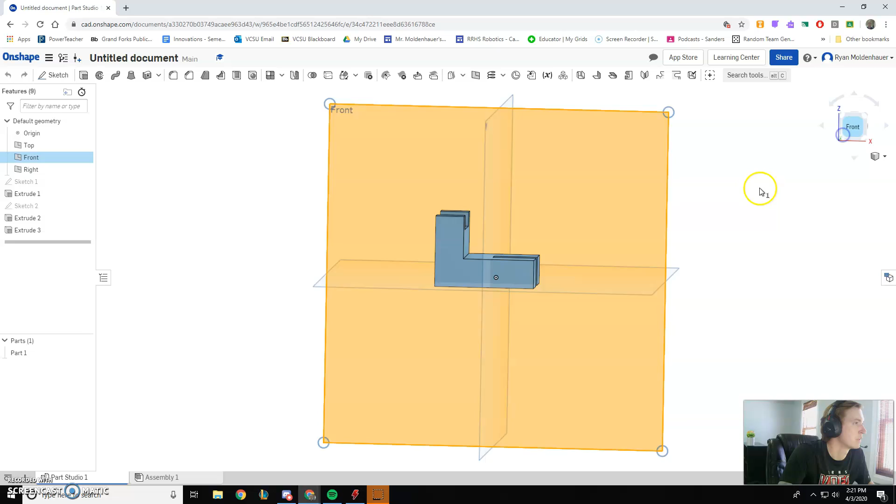One main thing that I noticed that made doing drawings a lot easier is when you draw this, use these planes to set it up the right way. When I did my drawing, I started with the front being my front view that I want. So when I knew I was going to draw this L, I put it on the front. The first time I drew this, I didn't do that, and it made it a lot harder to do my assembly file. But if you go ahead and put your front view on the front plane when you draw it right away, and have it the way you want, it'll make doing your drawing so much easier.

So here's an example. Once I have my part, your assignment this week is to do a fully dimensioned drawing of that. Now you can go over here and hit create drawing if you want, or you can just right click the part and create drawing of part studio 1, which is the name of my part right now. Now I can select no views, which is what it would be like if I wanted to make a new one. Notice how I don't have 4 views there.

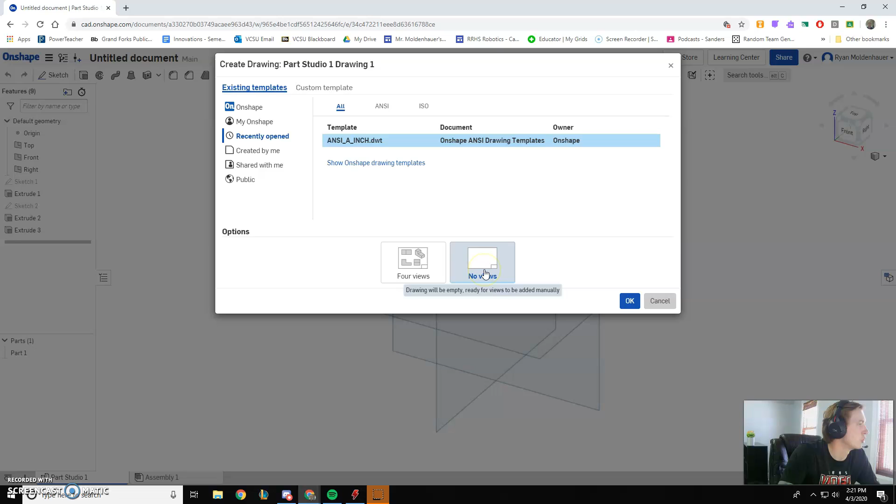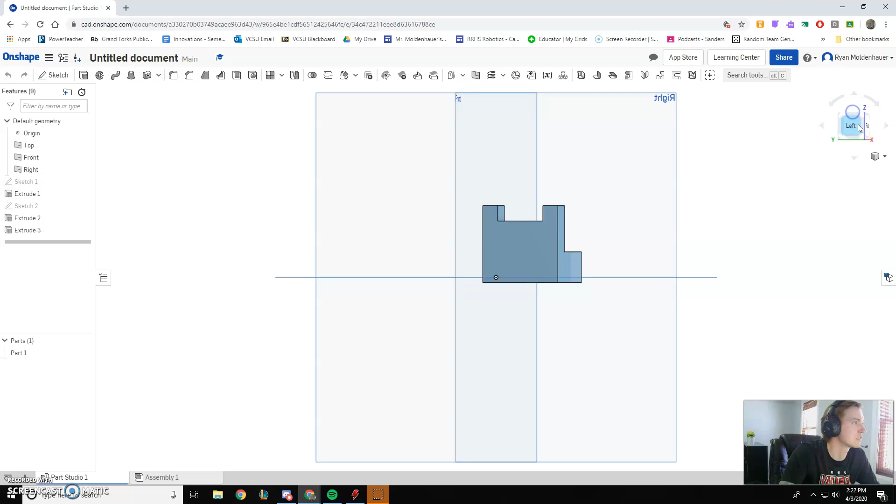Or this way, which I think is better, if you right click and do this again, you get the 4 views, and now since we have it set up the way it's supposed to be, right side is the right, top is the top. Whoops, that was left. Top is the top view, and so on. When we do this, it's going to auto-fill that for us, and it's really, really nice. Saves a lot of time.

So here's what it'll do. It just pre-placed everything for us. I've just been deleting this because we don't need to fill it out. You just hit the delete key if you want.

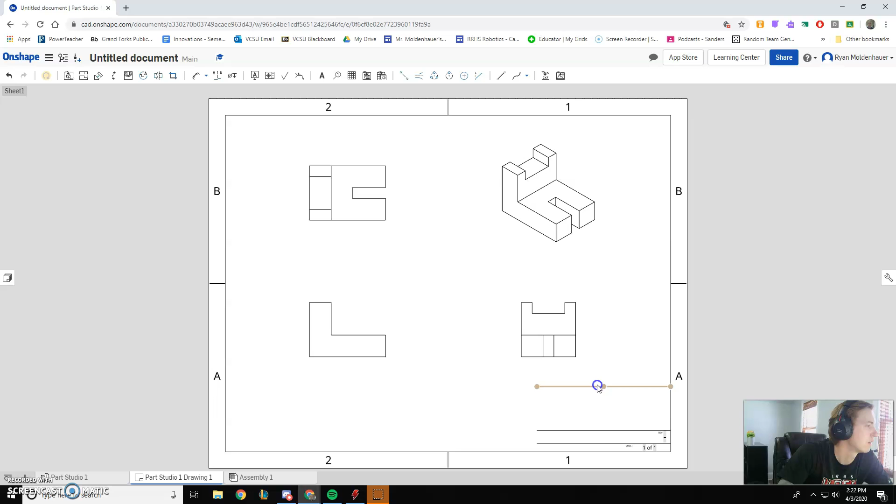Well, I did it right the first time until I'm on video. Sorry. You can leave it in there too if you want. It just bugs me. Okay, so you'll get this.

We have our ISO view, our top, front, and side. Notice it all is the way it's supposed to be. The right side of this ISO is right here, the front side is right here, and then the top is the way the top looks from this angle.

The other thing you need to do for a fully dimensioned multi-view drawing is we have the multi-view drawing, we just need to dimension it. The dimension tool is a little different on here, it looks like this, and you can choose the different dimensions if you want, radial, 3-point, but right now we'll just keep it simple and do the normal dimension.

And remember when we're dimensioning that we want to not have any repeated measurements. Sorry, I paused that for a second because I wanted my cheat sheet up so I wasn't sitting here double thinking, but I did this ahead of time so it wouldn't take me forever. But remember our rules: we always dimension between the views, we don't want to repeat anything, we don't want to over dimension.

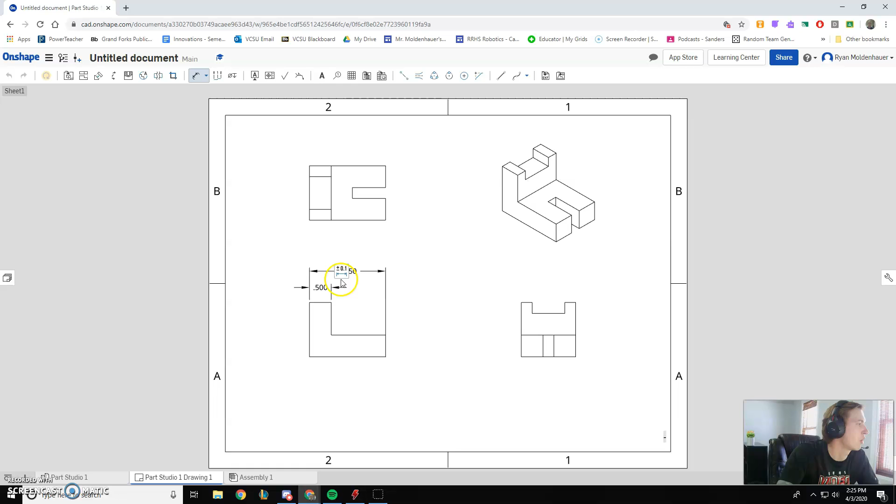I'll give you a nice example for that real quick. I always like to start with the front view and work my way from one side to the other. So right here we have that, and we have that. We don't need to do this one because we already have the overall and one of these. I could have done this one instead of that one too. I'll also just do the full height here, and I'll get this guy. Same concept there.

We go from here to here. That's a little off, I must have done that a little wrong, but I'll fix it. I actually don't need to do the whole thing because I already have it, but I wasn't able to see this one from this view, so I had to add that one in.

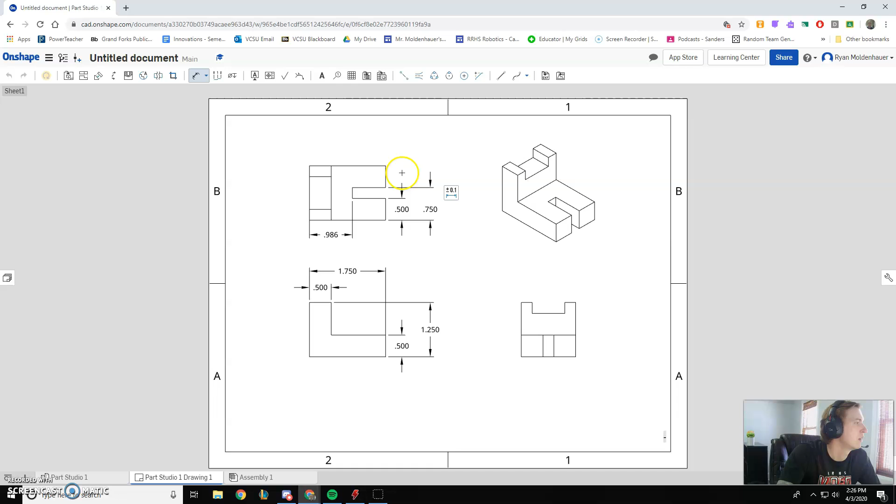It really should be an inch. I hit escape, so I gotta hit this again. We know the distance from here to here is 0.5, and we also need to know the distance from here to here. We don't need this top one, because we're going to give the overall width down here, just like this. But again, you can change where you have these if you want.

If you guys see any that I'm adding that I don't need, you can let me know. Move this up a little bit, so it's a little easier to see. And then I think I'm just missing, yep, just missing this height.

So I should have all of my dimensions, and if I look at my part one more time, I can tell if I'm missing anything or if I'm being redundant just by doing the math. This one might seem redundant, but it's not, because I don't have this little space as 0.250. But this is definitely the most crowded looking one.

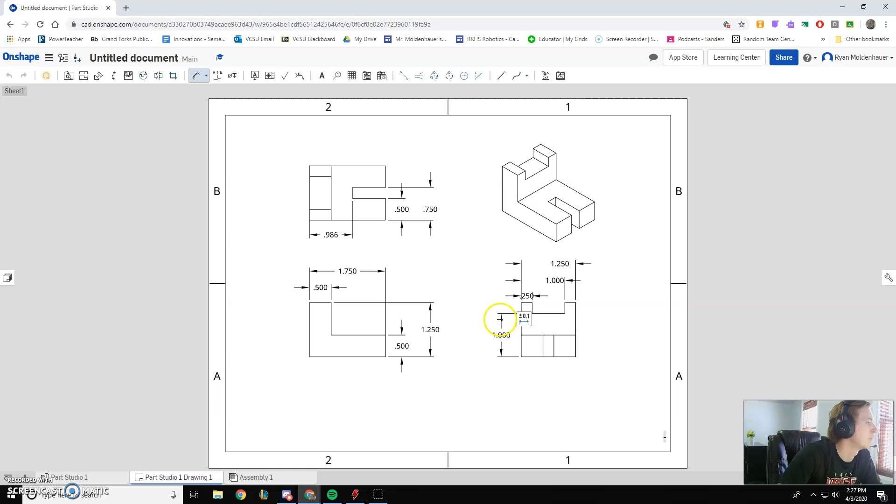The only thing I'm noticing is that this drawing isn't showing hidden lines, and my cursor's bugging out a little. But I'll look into how to turn hidden lines on. I'm still learning to use this as well. When we start doing section views, it'll be a lot easier.